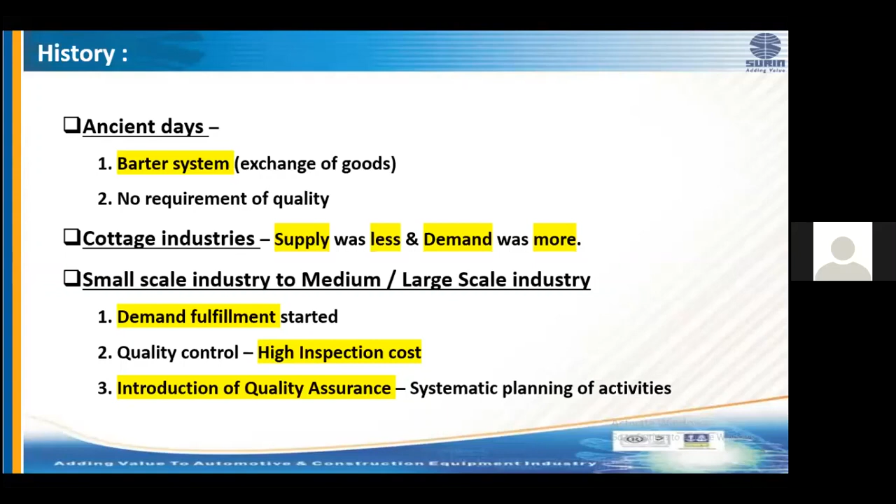Shipment was initially happening between states, within the country. When parts were getting dispatched from one factory to another factory or from one location to another location within the country, like in India, we have many states and each state has its own language. Similarly, there were different customers and each customer had their own documentation requirement. So a problem of multiple documentation came into the picture. And as there were no standards, the system was person dependent.

Later on, a need came where business started between countries. People started sending parts from one country to another country. Again, multiple documentation problems still remained. Person dependent problems still remained. All quality experts came together and thought of standardization, reducing dependency on human beings and having systematic procedures. And that was the birth of ISO 9000, the ISO system.

And next came management with improvement, which is called excellence. Excellence in easy words is nothing but, if we say that training was supposed to start at 4 o'clock and all 85 participants have logged in at 4 o'clock, that means we are in excellence.

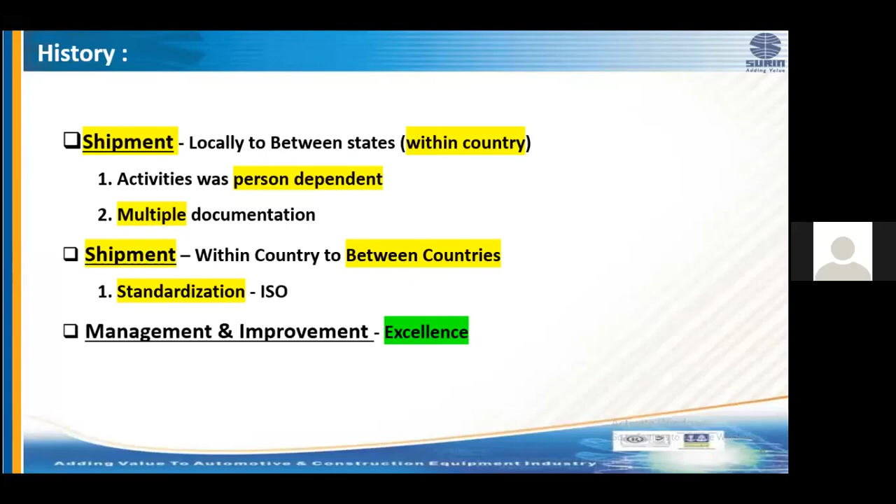There are a few definitions. I know most of you, the participants, may be from quality, and a few may be from production. But these definitions I have tried to explain in the simplest form of language. The first definition we'll understand is about quality. Quality means customer satisfaction or fitness for use.

I have mentioned as an example two types of cars. One is BMW, the other is Nano. If the customer buying BMW and the customer buying Nano are satisfied, both the cars are quality products. But if you just compare BMW versus Nano, then obviously the thought might have come to your mind, sir, BMW is the good quality car. It is not about the particular quality, but actually it depends on the segment, which segment customer wants which product. And if we have given him the product suiting his fitness, then it is okay.

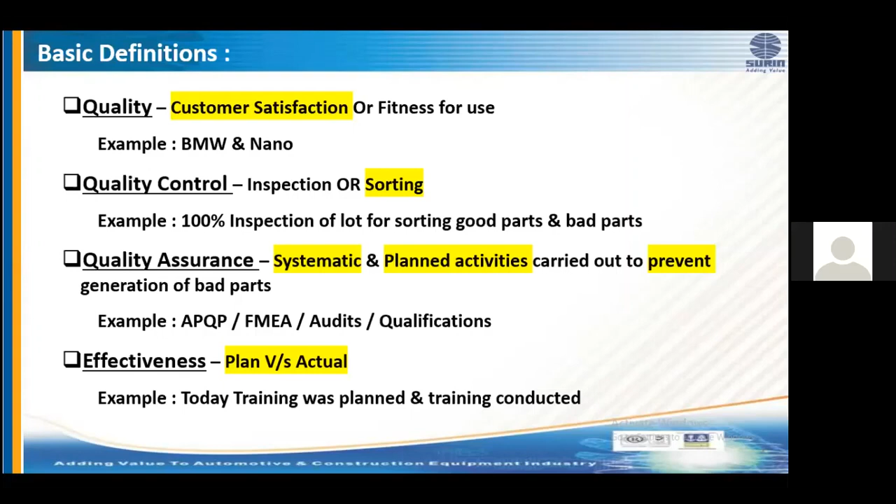The next definition is about efficiency. Efficiency talks about plan versus actual, but it also addresses what resources we have utilized. For example, in today's training, we are efficient. Why? Even though we are at different locations, through virtual, that is through Zoom, we all have logged in, I am providing training and you people are attending training.

Had this been a classroom training where physical presence was required, possibly some of you might have had to travel to Pune. Accommodation and lunch facilities would have been required. So we would have invested in resources and the training would have been at a cost.

Similarly, if Vasuli plant or any other plant does production for one complete year, keeps stock for one year, supplies parts to the customer from stock, and communicates that they have achieved the customer's delivery performance, in that case they are effective, because plan versus actual is achieved. But when we talk about efficiency, they are not efficient because the stock is already consumed.

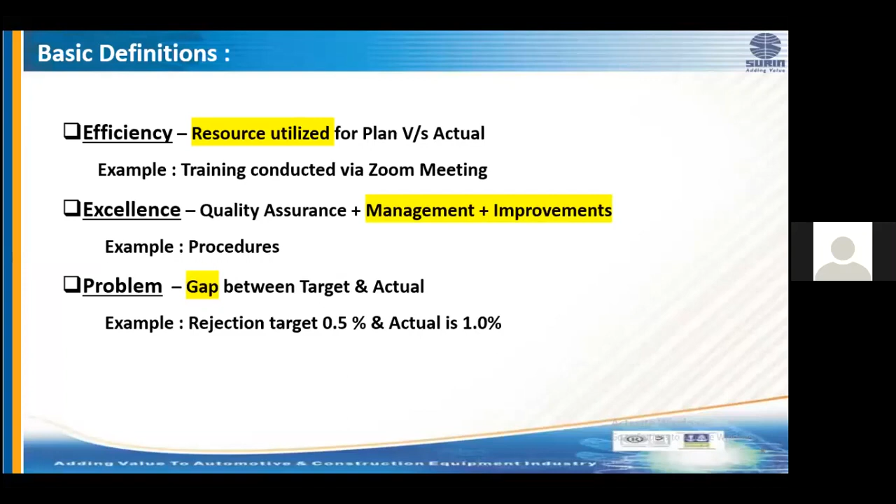Next, we'll try to understand what is the role of quality assurance. The topmost role of quality assurance is to maintain trust, because you are the eyes and ears of our management. Management cannot physically be present on the floor 24 hours. You are their representative. They have kept trust on you.

Whatever are the standard operating procedures, those need to be followed, and you need to be trustworthy. Second, you need to have the skill of continual improvement, that is, always you need to think how you can improve your processes. So trust and improve, these two are very important roles of QA.

The second role is about leadership. Again, leadership here does not mean plant head. When we have QA head in our plant, he is a leader. He has to demonstrate his leadership ability, ensure he involves all people, sets the direction, and ensures that problems are resolved, trust is maintained, and we improve ourselves.

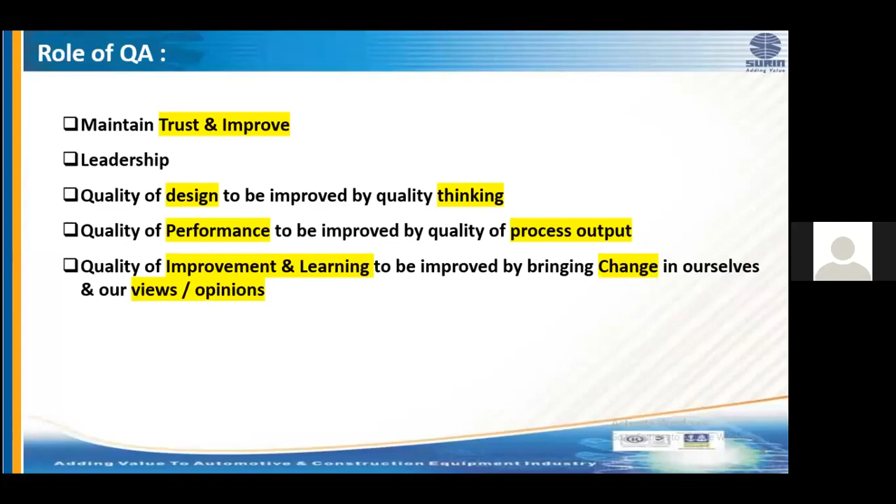So all quality heads who are attending this program should ensure that whenever they are discussing with their team members, you make it a point that these 5 things are always in your mind when you are communicating with your team member, and ensure that they perform work to justify this role.

Next, we will discuss a few fundamentals which a quality assurance person should know. Related to a problem, all quality engineers, whenever they are reporting any problem, these 4 basic things they should have in their report. One is where the problem was reported, where this problem got generated, who reported it. Why is this question important? Because depending upon the level, the language of the problem will change.

Suppose if this problem is reported by an operator, obviously he may not be fluent in expressing the problem. But when you visit Gemba and see the actual defect, you will be able to correct his language. I mean to say this language — it is not about English, Hindi, Marathi or any local language.

Second fundamental: everybody knows detection because this word is used in most quality documents. Detection is very much close to cause. Why am I talking about cause? Because root causes are to be eliminated. If someone has to find root cause, it will be somewhere near detection. So have control on detection so that you are very close to causes. Then you validate the cause, and if validation is complete and you find the cause is valid, then it will be easy to eliminate it.

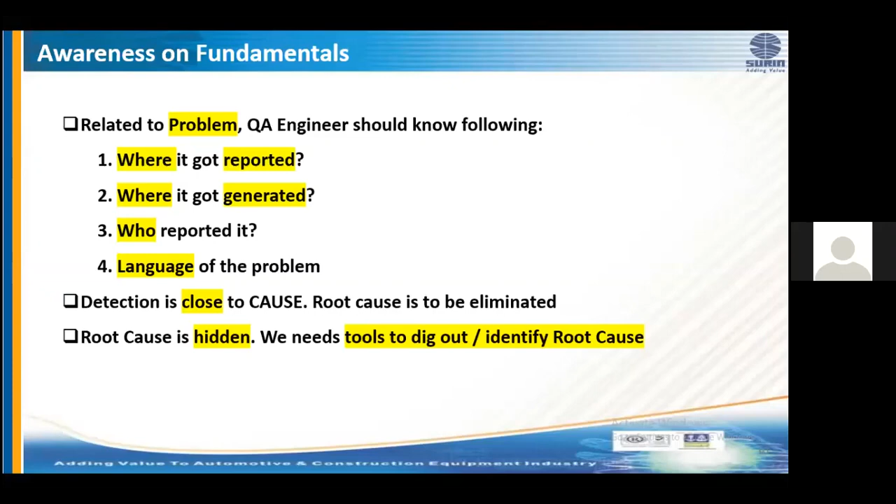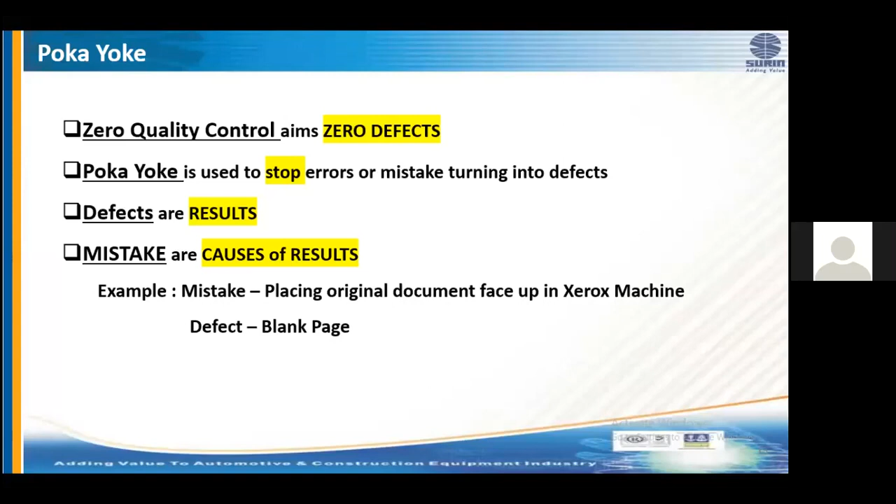There are a few causes which I would like to share with you based on my experience. I have listed these causes for why defects get produced, or why the output of the process or the result is defective. One is inappropriate or lack of procedures, standard operating procedures, or process parameters available with us. When we do defect analysis and plan corrective action after identifying the root cause, we correct the process and it becomes okay, and we see that, yes, we have installed Poka Yoke. During operations, there are variations happening.

Like in rotating parts in machines, we have bearings, and if bearings are not checked and not maintained, play may get generated between the bearing or coupling, and because of this variation, the machine output will be hampered and our product will be defective.

Sometimes there is variation in material. An example of variation in material is a lower grade material used instead of higher grade material. If we talk about a sheet metal unit, EDD grade is extra deep draw - this is high quality material. If instead we use only D grade material, the chances of cracking are more. Similarly, if E250 material is used in place of E350C material, then chance of crack or failure may happen. Worn out parts - like in machine assembly or gearbox, we have gear, shaft and housing - if the worn out parts are not removed, then again we see the machine output has a problem. And sometimes human beings make errors and perform incomplete tasks, because of which defect happens.

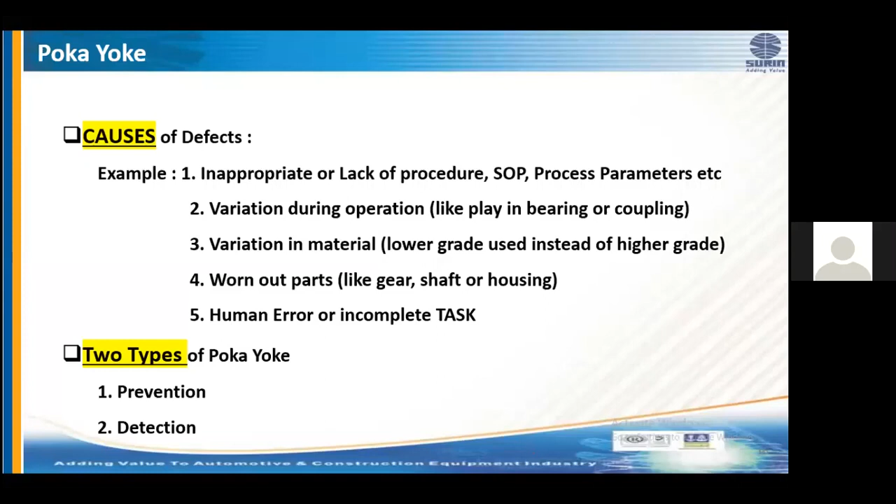There are two types of Pokayoke: one is prevention, the other is detection. Prevention means it prevents the defect from occurring, and detection means it detects after the defect is already produced. Please remember these two different types of Pokayoke. Everybody who has implemented Pokayoke in their plant should try to classify it, whether preventive or detective. The objective is to implement preventive Pokayoke. Wherever prevention is not possible, you can use detection Pokayoke, because ultimately the objective of Pokayoke is zero defect. So zero defect means we should aim at implementing preventive Pokayoke.

In prevention type Pokayoke, suppose for people who are driving a car - you see, we cannot remove the key until the car is fully stopped. Fully stopped means you need to turn off the car's ignition, then your key will come out. You need to stop your ignition and then remove your key.

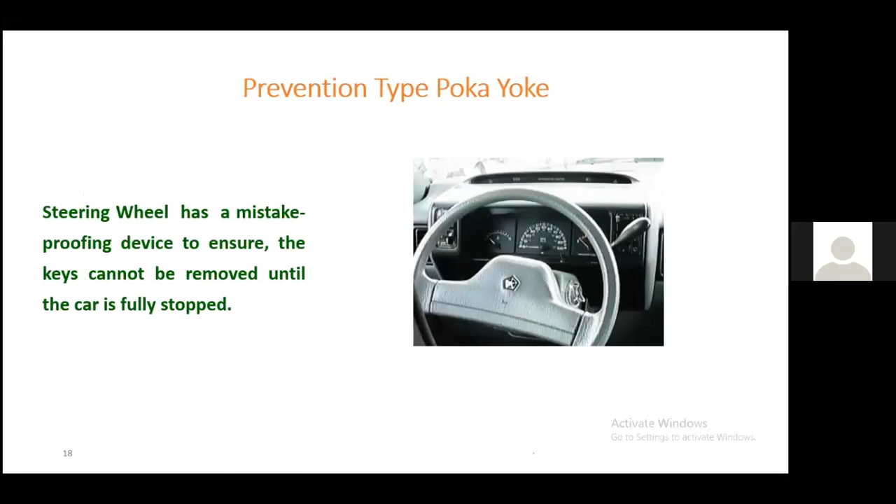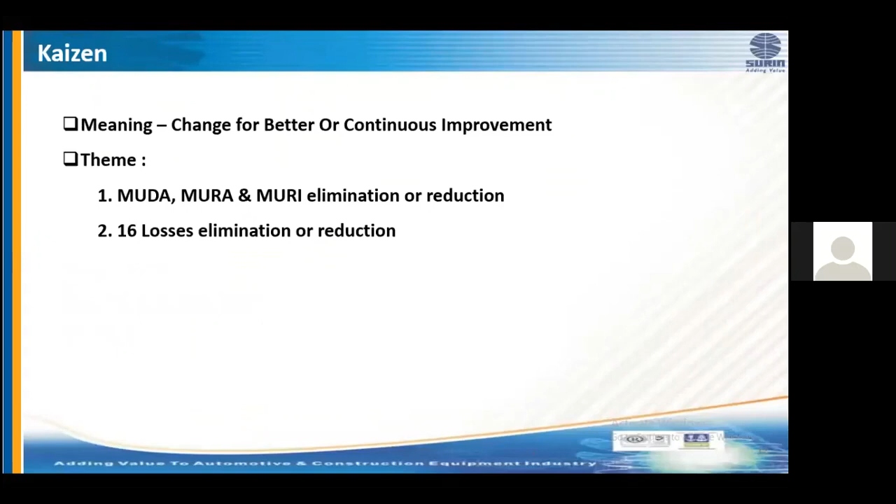Next, we will discuss standardization. Standardization is a carry-forward point from defect detection at source. You remember this slide? Hello, guys, you remember this slide? Yes, sir.

Where we spoke about standards, and we mentioned that an important role of QA is to ensure that standards are revised, and equally other HODs' work is also to revise their own standards, but the majority of the work is to be done by the quality department. There are different types of standards. I have listed only two types.

The first one is technical standard. Whenever we are discussing with a customer or management or in a cross-functional team, sometimes we say, where is the technical standard available? That is the reason why this rejection part has been produced. The meaning of technical standard, for everybody's easy understanding, is: this is one of the methods amongst other available methods, which is the most efficient method. This is technical standard, because technical standard is prepared by the customer.

There are various types of material like D grade, EDD grade, DD grade material. But when the customer is designing that part, he thinks of EDD grade, he prepares a drawing, he mentions the material type as EDD grade. There are certain tolerances mentioned on the component. He sees whether this component is fitting in a critical area, whether its assembly is critical, and based on that the tolerance is specified. And there is a general tolerance chart available. So all these types of standards qualify as technical standard.

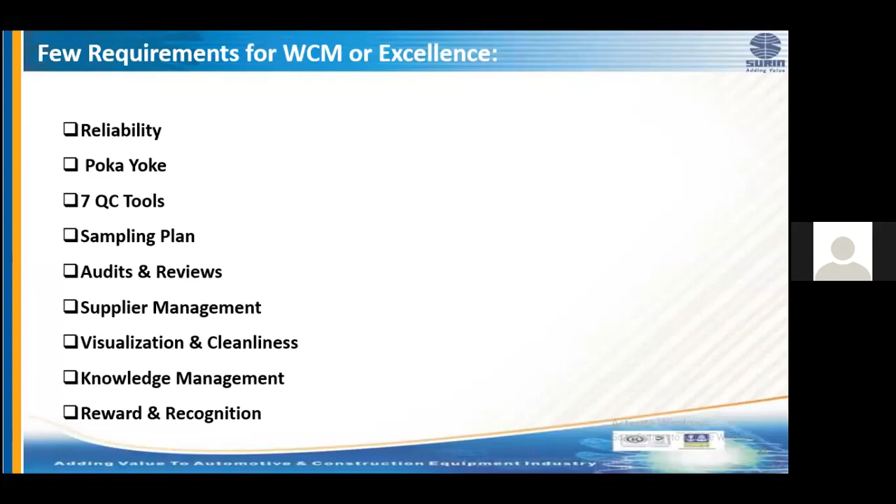Poka-yoke, we discussed. 7 QC tools; I think people are aware of the 7 QC tools. Sampling plan, audits and reviews, supplier management, visualization and cleanliness, knowledge management, and lastly, reward and recognition. These are a few requirements which I have listed. You can add based on your experience, your customer requirement, your location requirement or your organization requirement, and see that these requirements are implemented, well documented in processes, people are trained, and you are on the journey of world-class manufacturing or excellence.

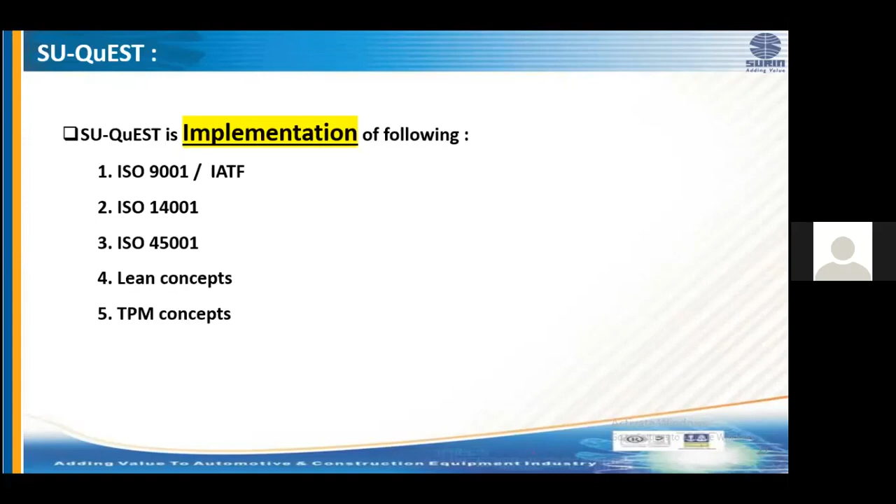This is my last slide. This slide is about SU-QuEST. After going through all 111 requirements of SU-QuEST, in a nutshell, what I can mention is you will be able to implement SU-QuEST if you have implemented well ISO 9001 or IATF requirements, ISO 14001 requirements, ISO 45001 requirements, lean concepts, and TPM concepts. Thank you.

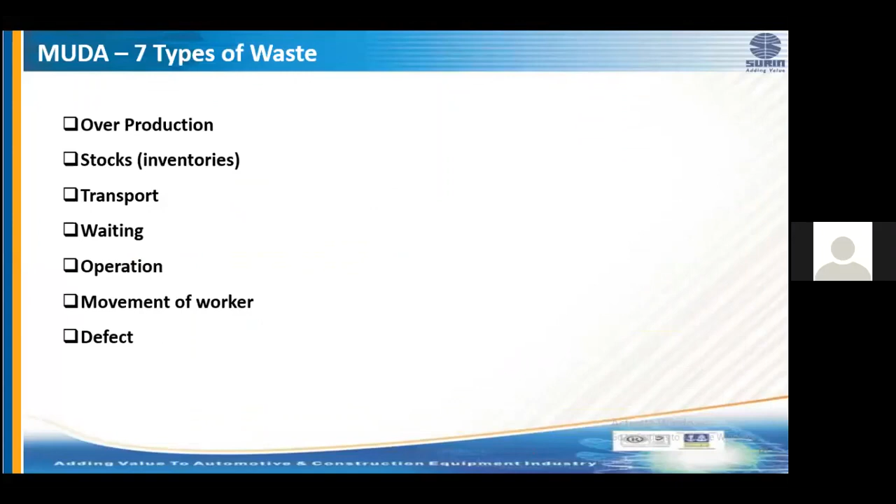Sir, I have one question. In any organization or any plant, if we have to improve the quality of the product or process, what kind of strategy should we implement? Okay. See, go back to the slide where I have mentioned defect detection at source.

If we see this process, how is a standard prepared? We prepare failure mode effect analysis. We prepare a flow process chart, we prepare FMEA, we prepare a control plan. Control plans are standards, displayed on the workstation. We train our people. Sometimes we find that standards are insufficient. Insufficient means the team who was involved in preparing this document had limited knowledge or less experience, and they have missed a very important detection point.

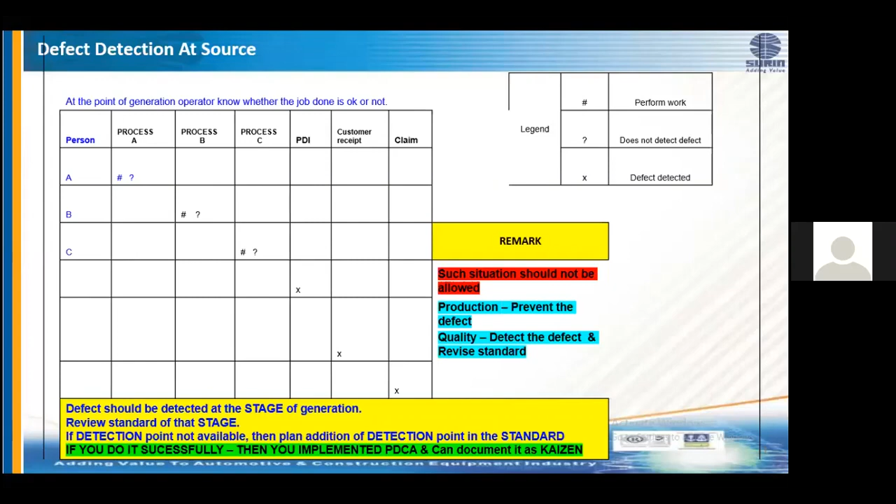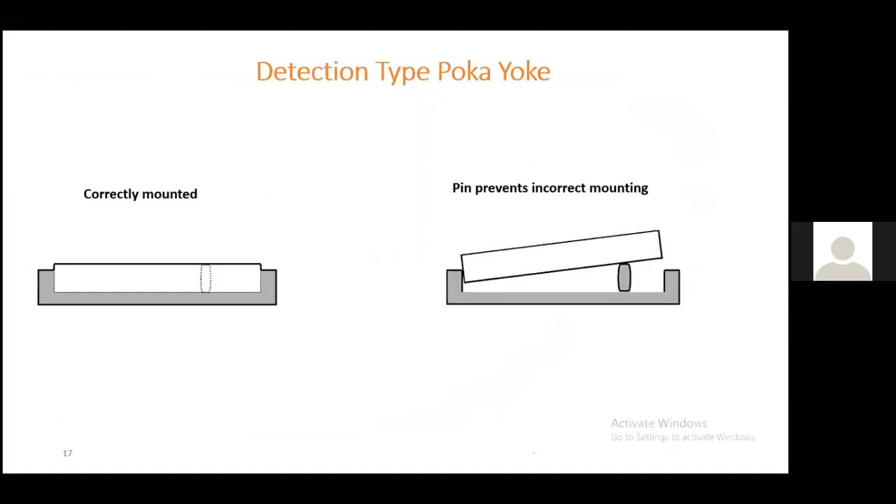So if you implement this concept, it gives you the opportunity to improve standards, and if you improve standards, the production department gets trained and puts their effort into preventing defects, and the quality department detects defects. And when we talk about processes, people need to be trained on variation analysis. They need to understand the concept of variation, what a stable process is, what an unstable process is. That is a separate topic, which will need maybe another 1 or 2 hours to share my experience.